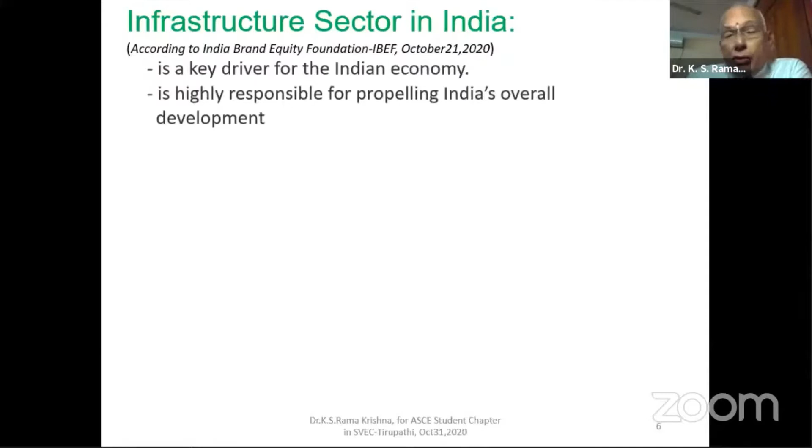With this great advice of our great civil engineer, I would start with the infrastructure sector in India. I have taken this very latest data from the India Brand Equity Foundation. This is the latest on India infrastructure: it is the key driver for the Indian economy, highly responsible for propelling India's overall development. If you develop infrastructure, your overall development also will take place.

We have seen this when the Golden Quadrilateral was completed, how the country had changed a lot. The government of India has an intense focus on some projects, importantly the infrastructure projects, so that they are completed in time, in a time-bound manner, and in the process we will be able to create world-class infrastructure.

The government's policy support includes several measures, but I've just picked up a couple of them. One is housing for all—we are about 134 crores, even a quarter of that, if we make houses, I think everybody will be housed. Another is smart cities, and 100% foreign direct investment on the automatic route across various infrastructure sectors, including power, bridges, dams, roads, and urban infrastructure. In these areas, the government has said 100% foreign direct investment can be automatically brought in.

India requires about 50 trillion, about $777.7 billion by 2022 to have sustainable development. The most important thing is getting the money, and we should be able to spend it. This is where the construction industry plays an important role. If you want to spend 50 crores in a month, you must have the right equipment and people so that you can construct and get that kind of expenditure. Otherwise, money will only be in the bank and you will not be able to spend it. So you should have all the resources to spend so that you can construct the infrastructure. Simply getting $777 billion by 2022 doesn't help unless the construction industry is geared up for that.

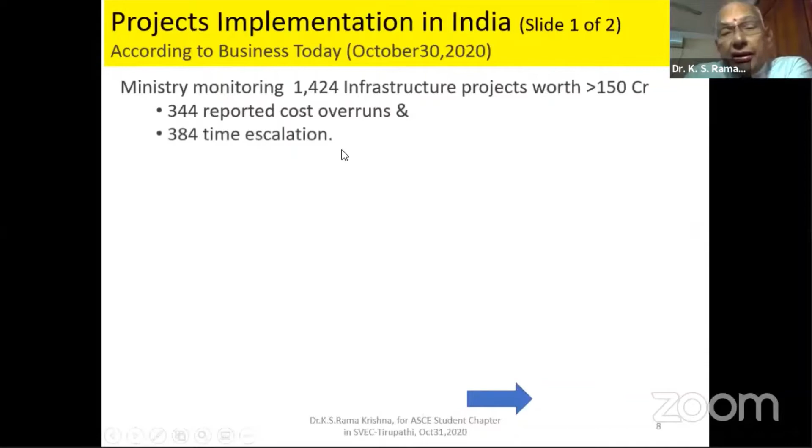Out of that, 344 projects are reporting cost overrun. That means their estimated cost is exceeded even before completion of the project. Then there are 384 projects that have undergone time escalation.

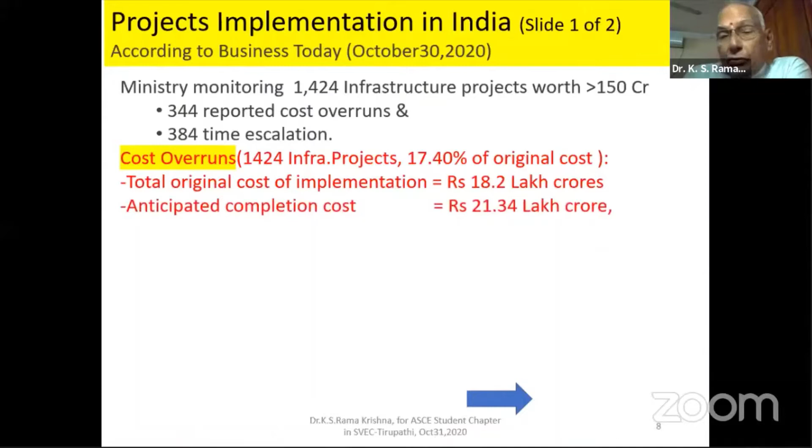Now, looking at this cost overrun, let us look at the figures of these 1,424 projects. Total original cost of implementation is 18.2 lakh crores. Anticipated completion cost is 21.34 lakh crores. You can see the difference. Overall cost overrun is 3.16 lakh crores, which is about 17.4% over the estimated cost. This is as per the Ministry of Statistics and Program Implementation, December 2018.

I think I'll do it. I don't know how to reduce this screen, side screen here. Okay, now that is as far as the cost overrun is concerned.

Now let us look at the time overrun. Out of the 384 projects that have gone over estimated time, 113 projects have overall delay in the range of 1 to 12 months. 61 are in the 13 to 24 month range. 101 projects are delayed by 25 to 60 months. 109 projects show more than 61 months and above, that means more than 5 years delay.

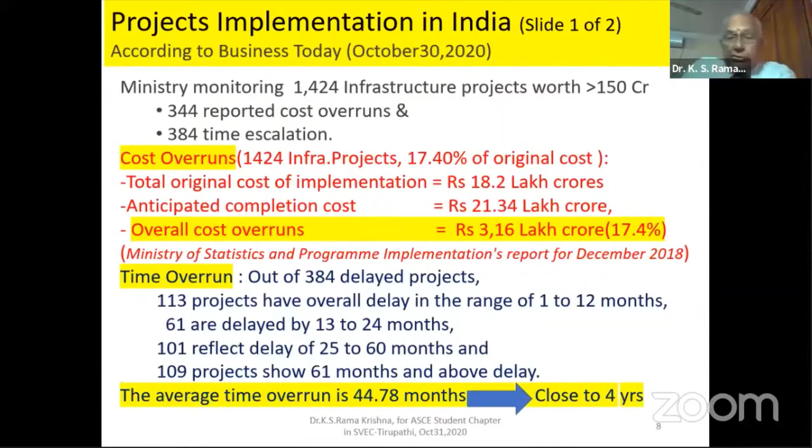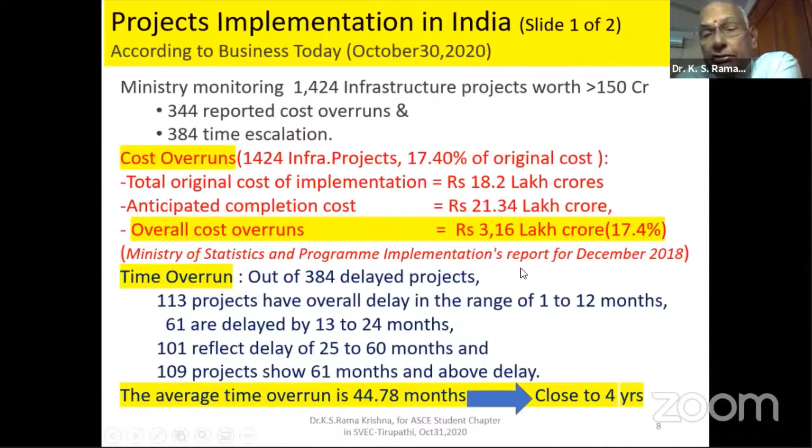Now, looking at this, the average delay of the projects is 44 months, that is almost 4 years. Can we believe this? Can we afford this kind of delay, which is coming to a cost overrun of about 3.16 lakh crores? What are the reasons for this implementation delay and cost overrun?

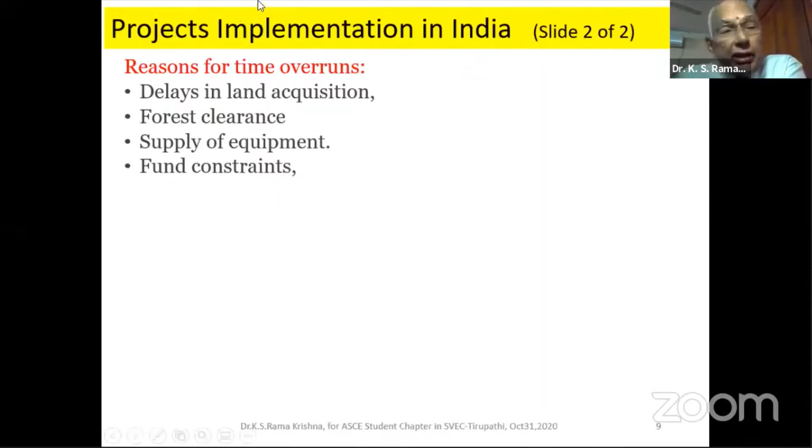Delay in land acquisition is a common problem. Forest clearance, supply of equipment, fund constraints - I think as civil engineers, we can't do much about this. But the other one, geological surprises - that is subsurface, the ground - that is related to my field, that is geotechnical engineering. The geological surprises, geo-mining conditions - I don't exactly know what that really is, mining or something else.

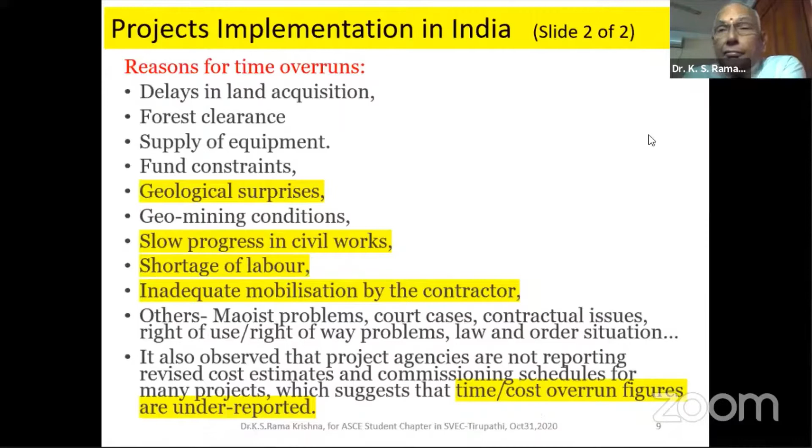And slow progress in civil works, that is connected to us as civil engineers, shortage of labor, inadequate mobilization by the contractor, that is also concerning our construction industry. Others like Maoist problems, court cases, contractual issues, rights - so all those things are there. And at the end, unfortunately, I'm not able to show this on the screen.

Now you see this, for many projects, the time and cost overrun figures are underreported. That means the actual delay and cost is more than what is shown here.

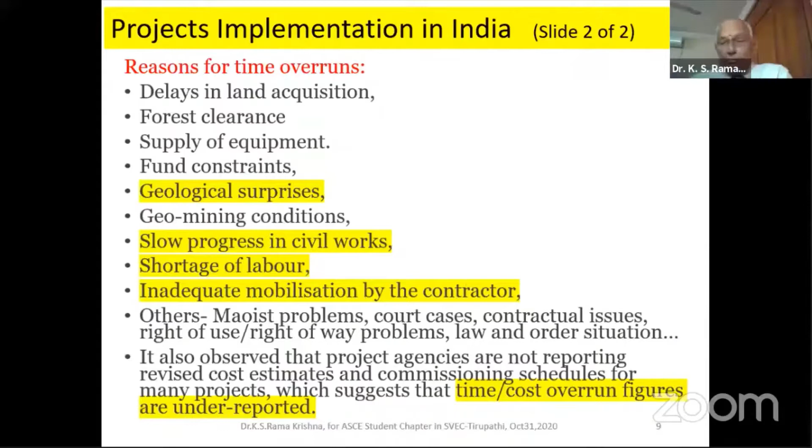I'm sorry, I'm not able to move this away from my screen. What, sir? No, this bottom toolbar, I'm not able to move it out because some lines I'm not able to read.

Okay, now what we should do as civil engineers is think about how to mitigate, how to reduce these problems being faced by our country in project implementation, particularly in those highlighted areas of geological conditions, labor availability, equipment availability, mobilization of resources by the contractors. These are the areas we as civil engineers must look at, and some of my slides will address them, not directly but indirectly. You can see that and understand.

Now, success of infrastructure project implementation depends, from my experience, on a good feasibility report. Normally the feasibility reports are also not done sincerely. They just put up some things and call it a feasibility report, which is not actually factual, but it is some sort of report which we cannot totally depend on. And timely finance and investment.

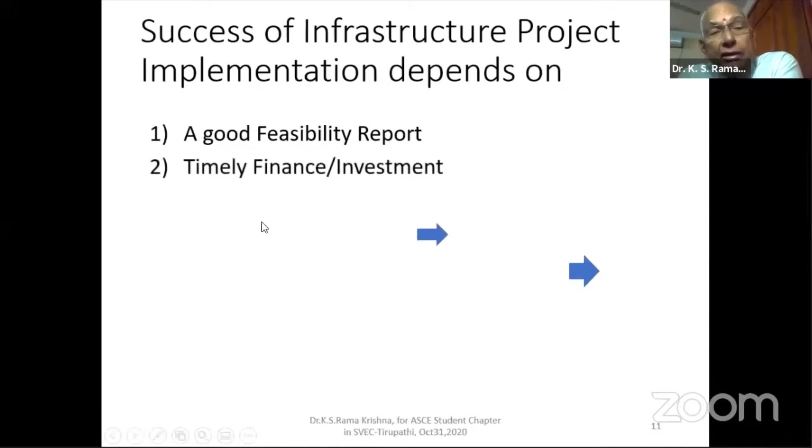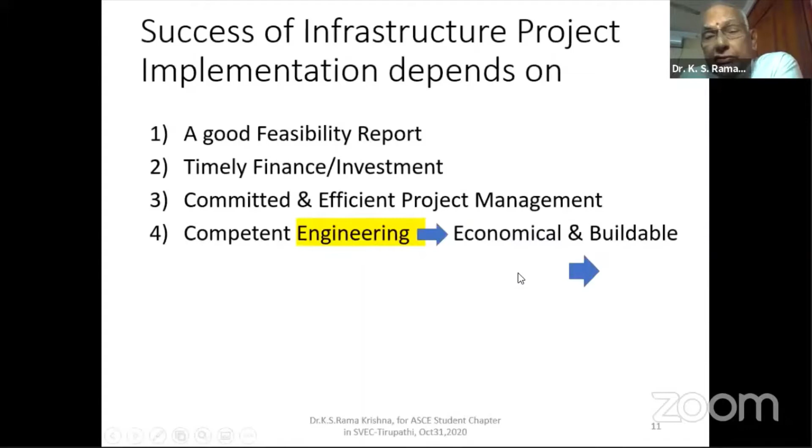Committed and efficient project management is very important. Competent engineering is also important—the engineering must be economical and buildable. Whatever is done in engineering should be buildable, considering available resources, manpower and equipment. Accordingly, designs should be done using appropriate technologies and equipment. Once these things are in place, you will have safer, faster projects to build, with less manpower and less management required at sites. That is what is called lean construction.

Then you need experienced construction engineers and a skilled workforce. If most engineers are going to IT fields, there will be very few left for construction and engineering design. This is a very serious problem facing the country. So even if you have 777 billion US dollars, or 50 trillion Indian rupees, available by 2022, without experienced construction engineers, skilled workforce and equipment, we will not be able to use that money in time. Your projects get delayed, and your infrastructure gets delayed.

Briefly, what is engineering and what is technology from a project point of view? As students, you must have seen that some colleges are called colleges of engineering, some colleges of technology, some colleges of engineering technology—various definitions and titles exist for engineering colleges. As a person who came from projects and construction, I am talking only from the project point of view, and you should understand it from this point of view during my lecture.

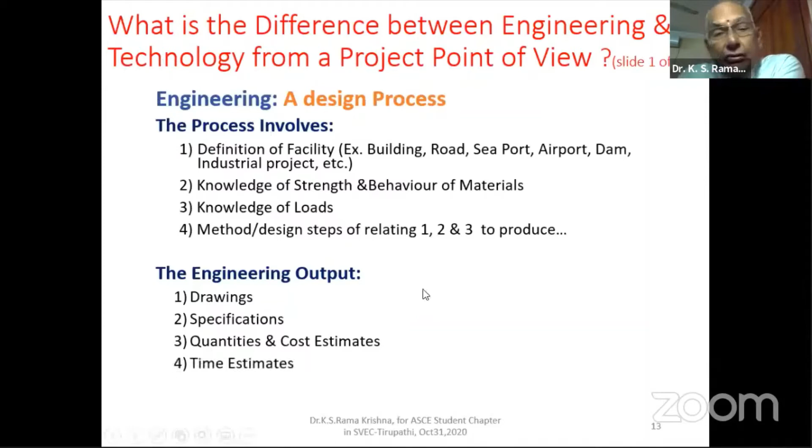Then what is the output? The output is basically in three categories. The first is the facility that you have created—at the end of construction, you see the facility created. But then, have you done it in time and within cost? That is the most important thing. If you have not done these two things—within cost and within time—you know you have not done a proper job. Although the building may look beautiful, if you have lost a lot of time and exceeded the estimated cost, then the project is in trouble.

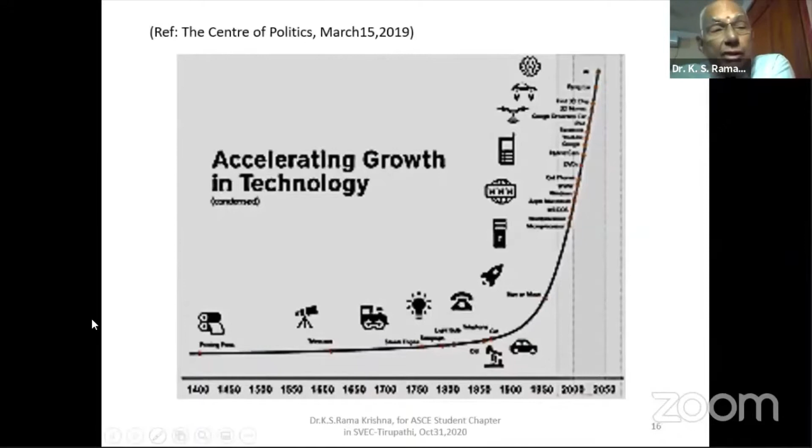You see what has happened. This is one I have taken from Center of Politics, March 15, 2019. You can see the acceleration of technology with time, starting from 1400 to 2050. Initially it has gone slow - telescopes, printing press, telephone, electric bulb, rockets. But of late, in the last 50 years, technology has gone exponentially, from rockets to artificial intelligence, mobile phones, internet - all happening in the last maybe 15, 25, 30 years. It is an exponential growth of technology. Unless you are abreast of these technologies, you will not be able to ensure growth at a rapid pace.

Now coming to the foundations, what is the role of foundations in project implementation? Normally, when you look at the project cost estimations, the foundation cost of a total project comes to 1 to 5% for an industrial project.

Supposing if it is a bridge project - bridge on river, offshore platforms, jetties, bridges - all these things normally come close to 50% of the project cost being the foundation cost. All normal industrial projects, the foundation cost will be about 1 to 5%. So it looks like a very small percentage of the total project cost.

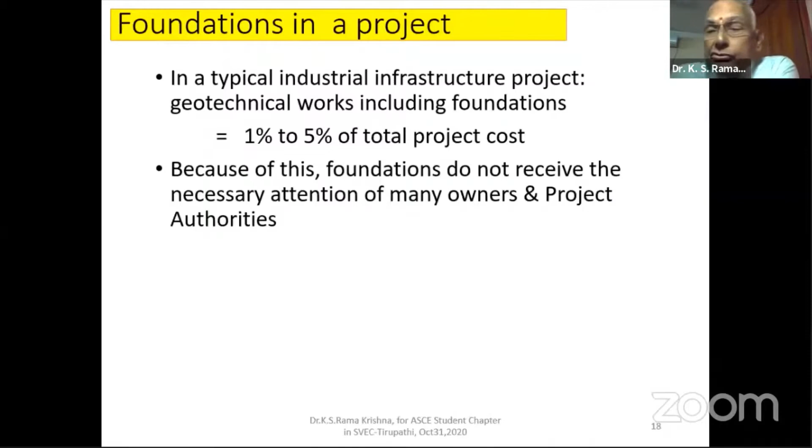Because of this, the owners and project implementing authorities do not really put sufficient attention to this foundation. They just call some subcontractor, whether he knows the job or not, and give the job to them, and the job will not be executed in time and properly. The project starts, they bring some contractors, subcontractors, foundation contractor, and ask him to start the job. He will not have the right knowledge, will not have the right equipment, right people. So the project gets delayed.

In a project of, let us say, 40 to 50 months, for the first 6 months, people may not really bother about the delays. Whereas normally a typical foundation construction time will be maybe 3 to 9 months, less than 1 year. So most of the time is lost because of poor selection of the subcontractor, the methods, the equipment, and the labor. By the time they realize this, the project is already delayed by at least 6 to 9 months.

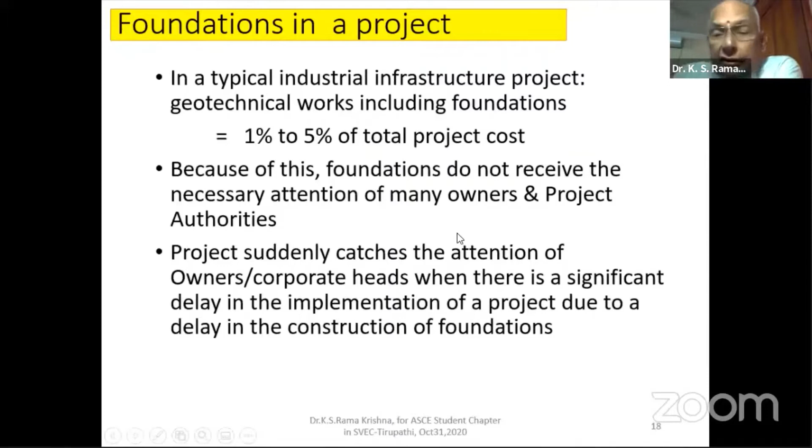That will go on getting accumulated, and the entire project gets into trouble. So unless the foundations are done properly and in time, the entire project suffers, because without foundation you cannot do anything. First thing is the foundation. It has to be done in time. If it is not done in time, the entire project is delayed. There's no way you can recover.

Now, one project I was involved in, in the eastern part of our country, where we were setting up a steel plant. The client had selected a type of foundation - the client's consultant wanted bored cast-in-situ piles. We got the total job, and when I went to site, we told them this is not the right type of foundation. I requested a demonstration of a new technology, and we spent our own money and told them they better adopt this. But because of our contractual procedures, they said we can't change the contract now.

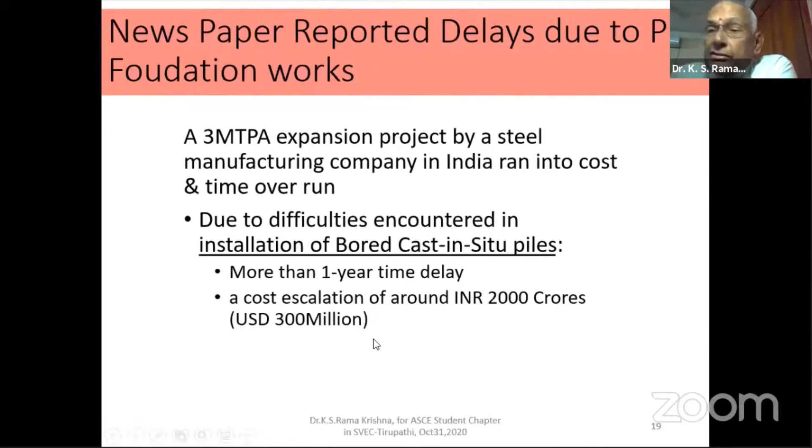As a result, this project got delayed by more than 1 year and resulted in a cost escalation of more than 2,000 crores. And these are not my figures - the CEO of this steel company published this in the newspaper: a 3 million ton per annum expansion project resulting in a 2,000 crores cost overrun and 1 year time delay. So whose money is this? It is public money, and we put it down the drain just because of delay in foundation works. Selection of foundation was not correct, and the whole project went to a disaster.

Now, as you know, every structure requires a foundation - foundation is the first step. First step, I mean not site clearance and survey and things like that. The first actual construction, the first step in construction, is foundations.

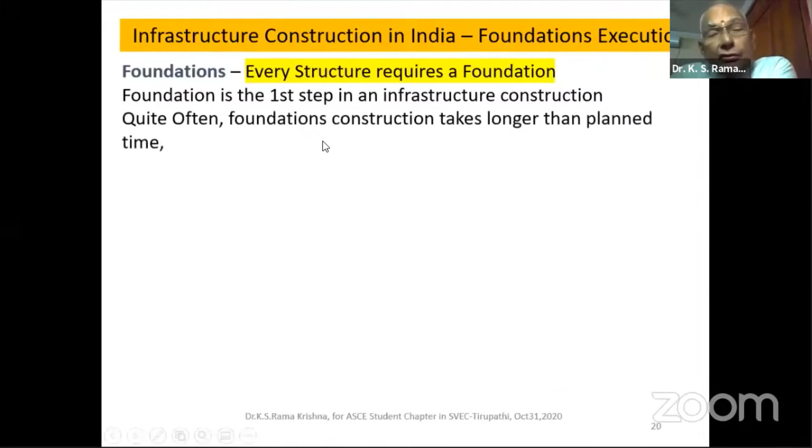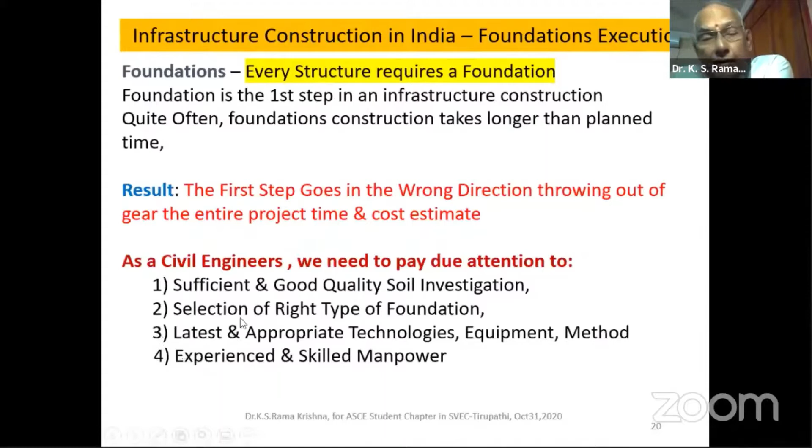Quite often, foundation construction takes longer than planned time, and the result is the first step goes in the wrong direction, throwing out of gear the entire project and time cost. So as civil engineers, what we need to do is pay due attention to sufficient and good quality soil investigation, selection of the right type of foundation, latest and appropriate technologies, equipment and method, and experienced and skilled manpower. Unfortunately, most construction engineers are not familiar with the latest foundation technologies happening in the world, and if they themselves don't know, you can imagine where the skilled manpower and skilled engineers will come from. So these are the most important parts of a foundation construction.

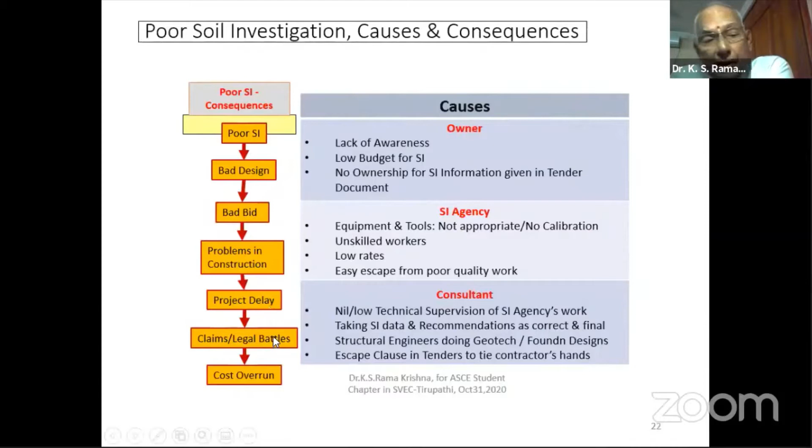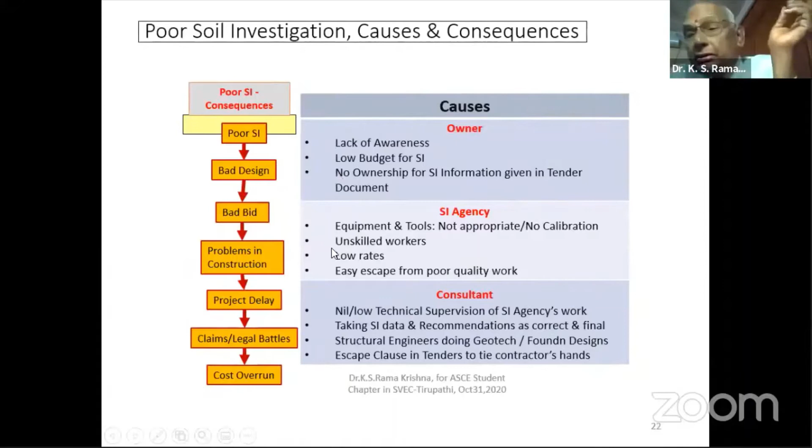Soil investigation is something we are trying to improve at the Deep Foundation Institute, by training laboratory technicians and field operators. The most commonly encountered challenge in a project is the quality of soil investigation and report. People generally gloss over this and don't announce it, and they proceed with design based on poor quality soil investigation reports. Numerous projects of national importance suffer delay and cost overrun on account of poor soil investigation. I have shown one flow chart of how poor soil investigation results in various problems, from bad design, bad tender documents, during-construction problems, project delays, contractor claims and legal battles, and cost overruns. I don't want to spend more time on this, so you can go through it in detail after the lecture.

Now, the second point is selection of the right type of foundation. I'll give you a small flow chart on how you should proceed in selecting the type of foundation. I'll spend a couple of minutes on this.

First, get good soil investigation done and obtain a good soil report. Engage a knowledgeable geotechnical consultant and let him study the soil data and the loads coming onto the soil. Also consider the performance criteria - whether the structure is sensitive to settlements, whether it's in an earthquake zone or a cyclone prone area. All these aspects should be studied, along with cost, time, and project schedule.

If all these things are considered, the first choice should be shallow foundations. Shallow foundation means, particularly where soils are very good like in Tirupati, you can just make an open excavation and construct an isolated foundation, a mat foundation, or a combined foundation - all at shallow depths. These are called shallow foundations, and normally they are cheap if soil conditions allow. This should be our first choice. We should not jump to pile foundations even if the structure is very important.

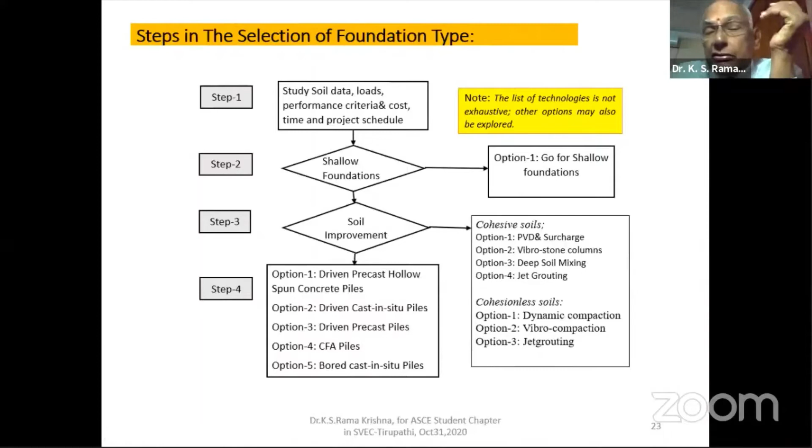When you encounter soils, you broadly see them as cohesive soils like clays and silty clays, or cohesionless soils like sands and gravels. There are several technologies available for soil improvement, and the list I've given here is not exhaustive - there are more than 40 or 50 technologies available, of which I've only mentioned about 10 or 15. You should explore all these options and consider soil improvement as a second alternative to shallow foundations.

I'll show these things when I'm showing you some photographs, and I'll explain them at that point.

Now, if shallow foundations are not acceptable and soil improvement is also not acceptable - because the structure loads are very heavy and critical, and sensitive to settlements - you have to look for other deep foundations.

Driven precast hollow spun concrete piles are the next cheaper option among deep foundations. Then there are driven cast-in-situ piles. Each of these has a different method, different material, different process of making them, and different testing procedures - many differences exist among them.

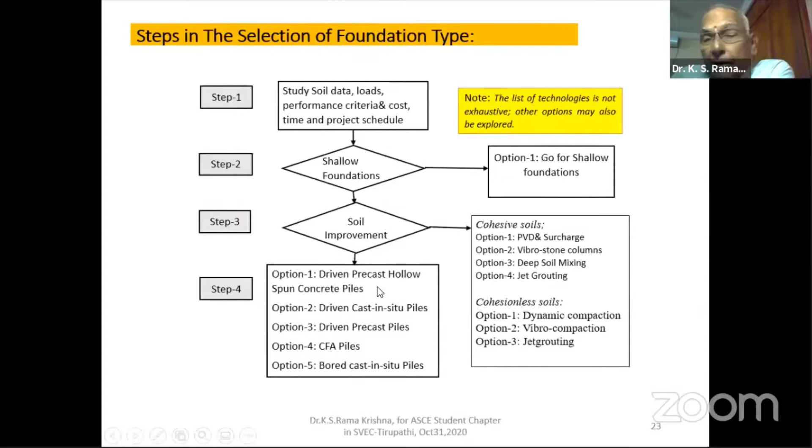Driven precast hollow spun concrete piles. This is the cheapest form of pile, other than timber piles, which nobody is using these days for important structures. So driven precast hollow spun concrete piles: we, from L&T, have done them in Dahej, and we have done them in Kakinada.

Option 2 is driven cast-in-situ pile. That is the next cheaper one. The third one is driven precast piles. This we have done in Kakinada, about 1.5 million meters of piles. We have done more than 40,000 piles. We have done in Kakinada for 2 gas terminals, one by Reliance, one by the Gujarat State Petroleum Corporation.

The other one is CFA piles. I'll explain to you what it is. Continuous flight auger piles. From the Deep Foundation Institute, we have tried to bring this technology. We have already done some demonstration, spending 80 lakhs, and we created a manual. Now we have approached the Bureau of Indian Standards to make it a code. This is the next cheaper one.

The last one among piles is bored cast-in-situ piles. They are very expensive. Unfortunately, in our country, this is the most common pile. Deep foundation is bored cast-in-situ pile. Unfortunately, that is one of the most expensive piles. Very unfortunate. We have got into the most expensive type of pile.

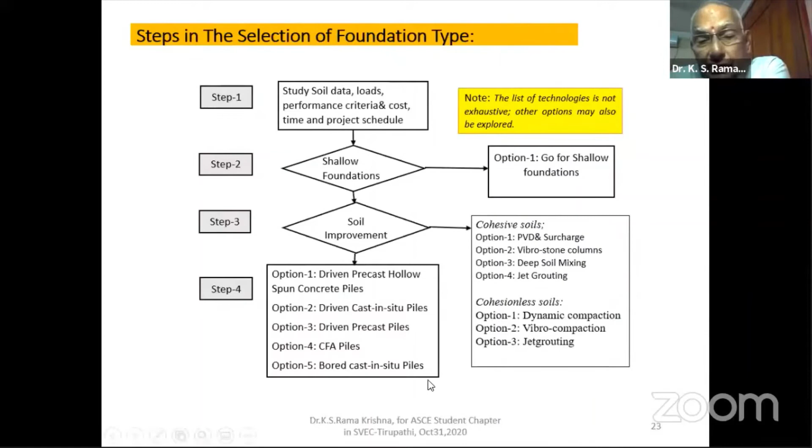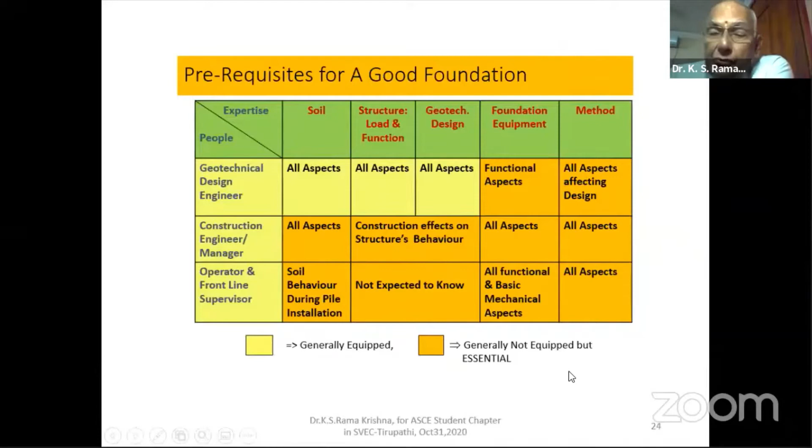Kindly go through them. Most of the time, the ones that I have shown in orange, people are supposed to know, but they don't know. So you can imagine how foundation construction becomes one of the most frequent reasons for infrastructure project delay.

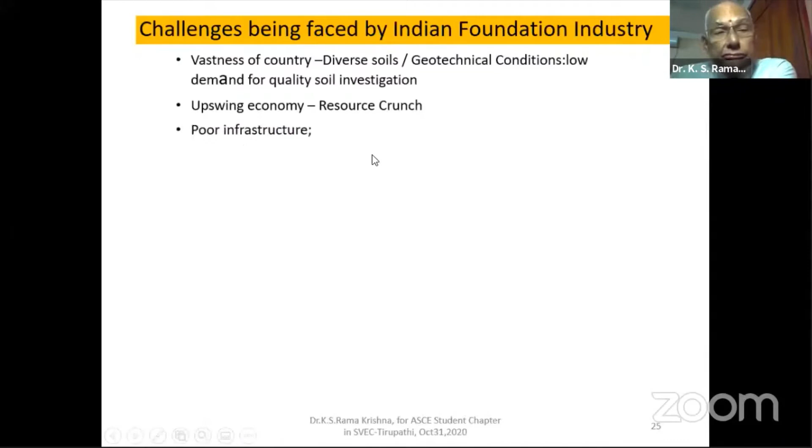Challenges being faced by the Indian foundation industry: the vastness of our country, diverse soils; geotechnical conditions are very different. If our economy improves, we don't have the manpower and equipment resources to actually construct things in time, because we will be short of resources. We have got poor infrastructure. Some of the equipment cannot reach the sites. Low technology and low mechanization. We have only recently started mechanizing. Out of 45, 50 technologies, some 2-3 technologies are used in India. The rest of them are not being used.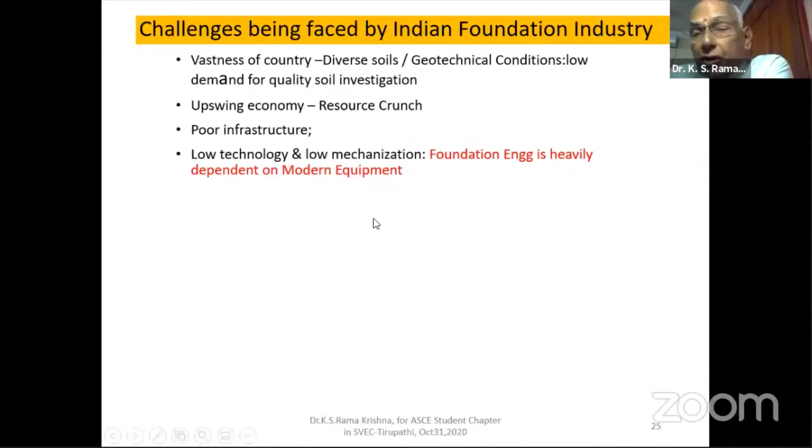Geotechnical knowledge is confined to the academic institutions. Most of our academic professors are very good and have up-to-date knowledge of geotechnical engineering. But when you go to practice, to the construction industry, very few people are exposed, and most geotechnical engineers are not in the construction sites or in the design offices. Most of them are in academic institutions teaching. The importance of the geotechnical engineer in design and construction is not widely recognized in India. Whereas if you go abroad, even to Dubai or Singapore, you will find that geotechnical engineering is given very good importance.

General reluctance to encourage new technologies. We are somehow averse. We are not interested in bringing new technologies. Even technologies abroad that are 40, 50 years old, we are not willing to bring them. We bring and use only grandmother-time technologies. Site supervisors' exposure to foundation technologies is very low.

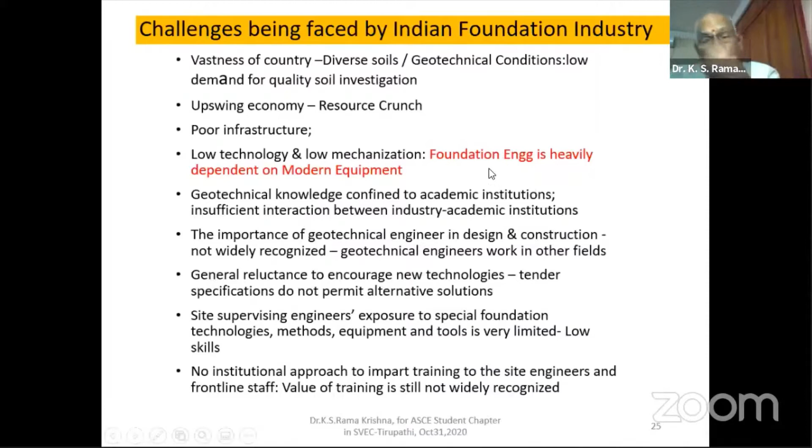So these are all the challenges being faced by the foundation industry. That's why, from 2010 to 2012, we tried to establish a Deep Foundation Institute in India. In the last 9-10 years, we have done a lot of conferences and seminars. Then we have done one technology implementation. We did a manual. Now we are going to make it an IS code. So these are all the things we are doing as the Deep Foundation Institute to help the country. So what are the various foundation technologies? Let us look at that.

Now, foundation construction is highly equipment dependent. Unlike other civil construction areas, foundation construction is almost 95% dependent on latest equipment. And unfortunately, in our country, we do not have this equipment. Most of the equipment is imported. Not a single equipment is manufactured in India.

I think it's our Prime Minister's Make in India policy. I hope somebody will start making it. Whereas China has been making most of the equipment required for themselves, and they are exporting them. So unless this equipment is manufactured in India, we will not be able to do it.

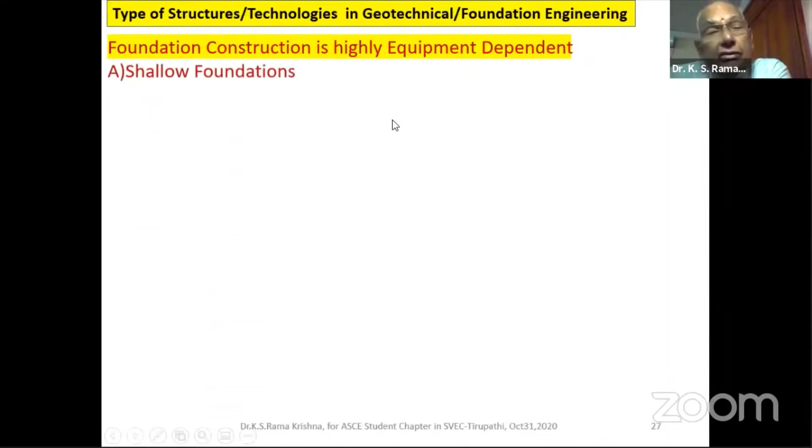Now, first thing, as I mentioned to you, shallow foundations. They have various technologies. Then second one is deep foundations, which I mentioned to you already in the flow chart. One is bored cast-in-situ piles, CFA piles, driven cast-in-situ piles, hollow spun concrete piles, steel tubular piles, and several of them. I have mentioned only 6.

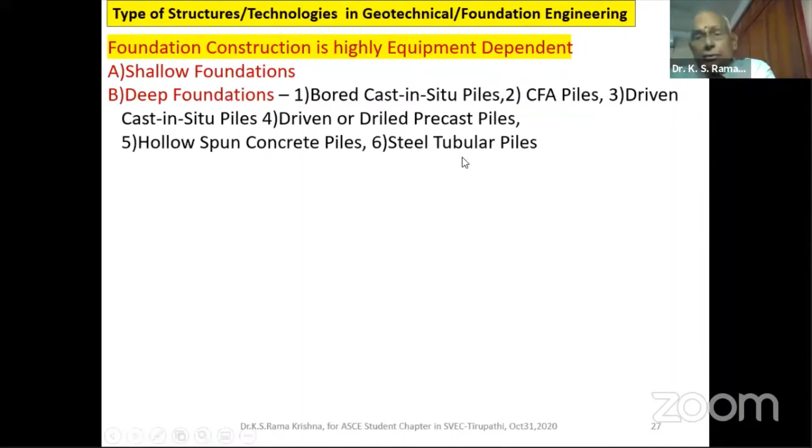Now coming to soil improvement and soil modification: vibrocompaction, stone columns, lime and cement columns, prefabricated vertical band drains and surcharge preloading, vacuum consolidation, deep soil mixing, cutter soil mixing, jet grouting. These are only a few technologies. There are many more technologies.

Then excavation support systems: diaphragm walls, contiguous piles, secant piles, Berlin walls, steel sheet piles. These are all used in our metro construction, underground station construction, and also in our coastal projects like jetties, wharves, port structures.

Slope and embankment stabilization using soil nails, largely used in Bangalore and other places. Gabions at the river fronts and all that, we use gabions. Anchors, we use in several places in excavation support as well as slope stabilization. Geotextiles, we use in embankment stabilization. Reinforced earth structures, you must be seeing bridge approaches and all that are done with reinforced earth structures.

Then dam cutoff walls using plastic concrete cutoff walls and other physical barriers. These are only some of them. As I mentioned to you, there are more than 45-50 technologies. I just listed about 25 of them. And these are all the technologies that are available.

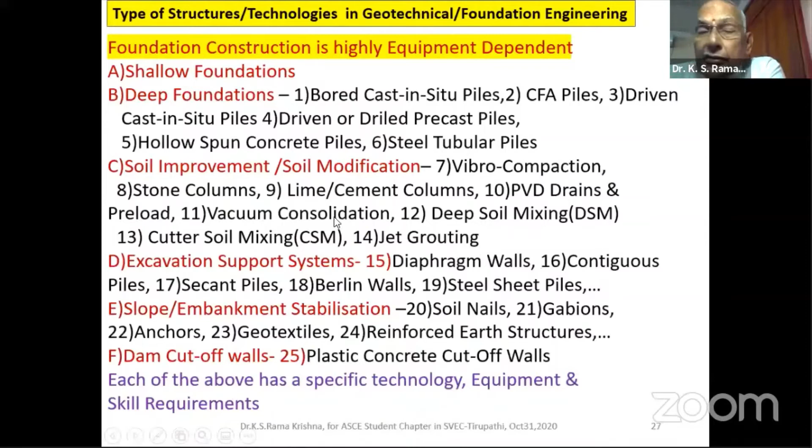Now I'll just go through quickly some of these photographs. Bored cast-in-situ pile installation sequence, for large diameter piles. This is a piling rig. Depending on its capacity, the cost of the equipment is lowest about 3 crores and highest around 15 to 20 crores. So if you want to do large diameter, very deep piles, you have to have that kind of equipment.

And we have got a few companies like L&T, Afcons, Cementation, Keller, Simplex. These companies have got a good number of equipment. Here, what we do is we do a temporary casing to stabilize the soil. Then we start digging the soil using this equipment. This is called boring tool. This is called Kelly bar, and this is connected to this. And here you have got winches and drive motors.

This goes through and drills the hole. We use a liquid called bentonite or a polymer to stabilize the walls of this borehole so that it doesn't collapse. Once we reach the required depth of the boring, then we install the reinforcement cage. Then we pour concrete by a method called tremie concreting. A long funnel is put, and concrete is delivered at the bottom. From bottom up, the concrete is brought up, and the pile is completed. This is how a bored pile is constructed.

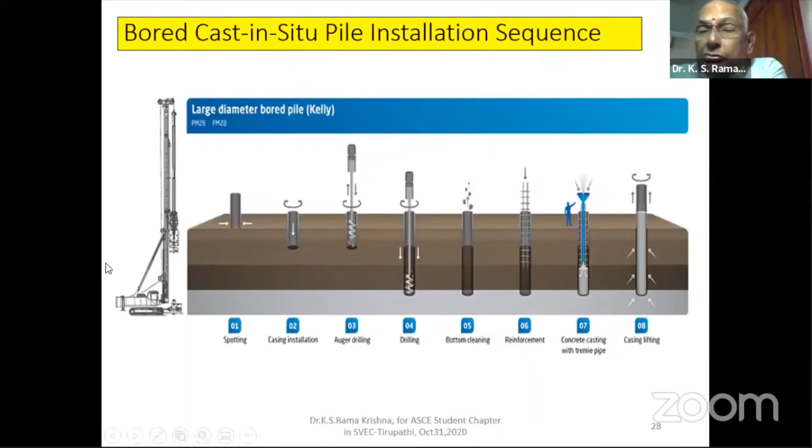A lot of issues come in during this if the contractors are not quality conscious. Each bored pile is a pain. You will not be sure of the quality of the construction, and it leads to a lot of problems. You may not be able to take the loads. But unfortunately, this is the most common, and one of the most expensive ones in the country.

Another one is driven cast-in-situ piles. This is also very common in India after bored piles. Here, first we drive a steel casing tube to the required depth with a bottom plate which is sacrificed. We leave the bottom plate in the ground, and we use a hydraulic hammer from a powerful pile driving rig to drive this tube.

Once it goes to the required depth, we put the reinforcement cage, and then we put concrete using this red one called a concrete skip, pouring from the top, and the whole borehole will be dry. Unlike the bored pile where you have bentonite or polymer, here it is a dry hole with bottom closed. You put concrete, and using the same hammer, slowly tap the tube and remove it, leaving the concrete and reinforcement in the ground. That's how the pile is made.

It's one of the latest technology equipment which we brought in when I was in L&T. This is very high productivity equipment, and we can do projects much faster than when we use bored piles.

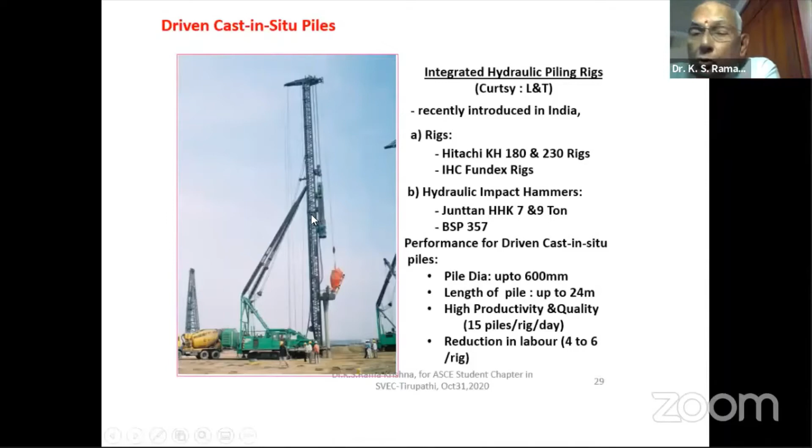The other one is precast driven piles. These are expensive compared to the other one, but if the size of the project is big, this can become very cheap. It's what we have demonstrated in Reliance Kakinada and several projects in Haldia, near Calcutta. Many projects we have done in L&T using these equipment. We brought them from Singapore, and these equipment also use a hydraulic hammer and drive the precast piles, already cast on ground, to the required depth.

So every day you can do about 400 meters, almost 20-25 piles per day per rig. Whereas a bored cast-in-situ piling rig can do only 3 or 4 piles per day. Here you can do almost 20 piles with one machine. So that is the kind of speed you can finish this job. The kind of job we did for our Reliance Kakinada, 6 months ahead of schedule. About 21,000 piles we have done.

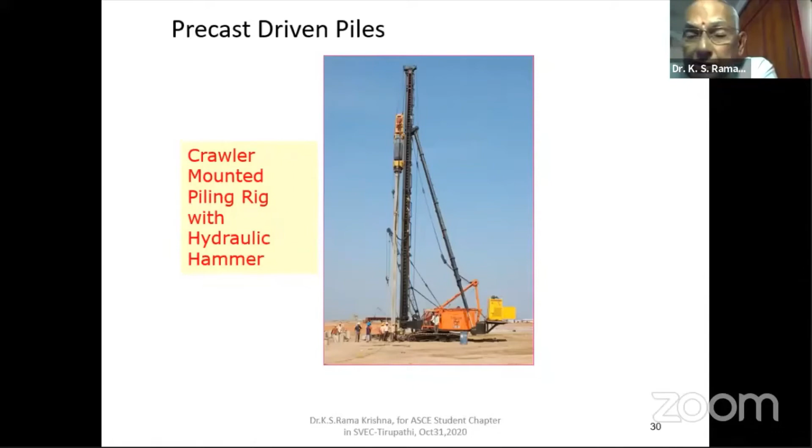The other one is continuous flight auger pile. This is CFA pile. This is a technology which is more than 30 years old abroad, but unfortunately, so far, nobody is trying this in India. So what we did was, using Deep Foundation Institute as a platform, we went to the industry and requested them to donate. We brought about 70-80 lakhs in both cash and kind. We requested a foreign manufacturer to bring his equipment, and we installed 6 piles and tested them, then made a manual. That manual is going to become a code soon.

Here, the piling rig will have a long continuous auger. This is like a screw. This drives into the strata, and this one will have a central hollow stem. And after it reaches the required depth, we introduce concrete from the top and pour it through this central hole. As it comes up, the concrete is poured inside, and the concrete is first. In a bored pile, we first put reinforcement and then concrete. Here, we first put the concrete and then put reinforcement.

There are some problems for doing this. The reinforcement cage may not go, so your concrete has to have proper flow characteristics. Its slump and spread have to be proper. All these things we have written in our manual. This uses the same piling rig that is used for doing bored piles, with small modifications. Whereas with bored piles one rig can do some 3-4 piles, this can do about 15 to 20 piles per day. So you can accelerate your construction, and the pile can become much cheaper.

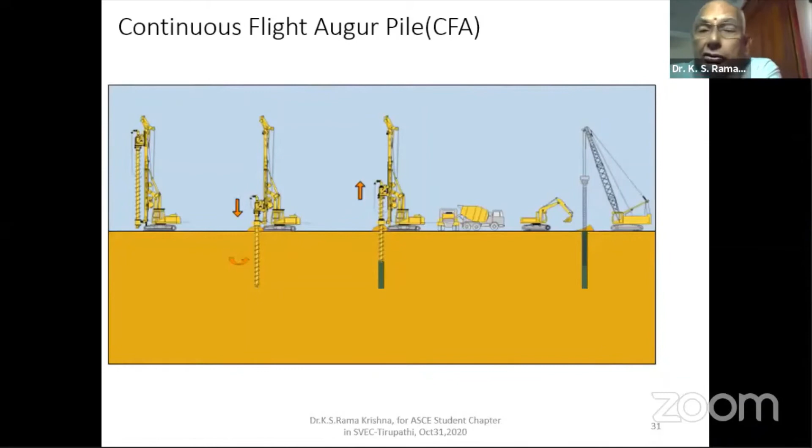The other one, I mentioned to you, is hollow spun concrete pile. They are also very cheap. L&T has used it, AFCONS has used it in some of the marine projects. Here the concrete is of very high grade, up to 80 megapascals compressive strength. It is a hollow pile, so it will not be like a solid pile like a precast solid pile, a bored pile or a driven cast-in-situ pile.

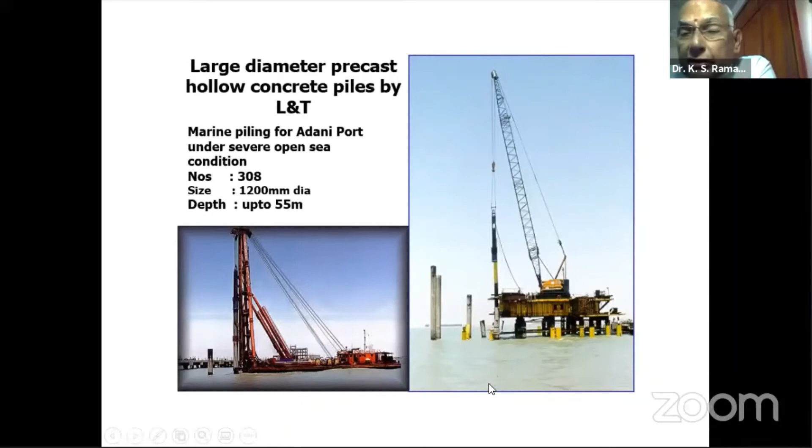Here it is hollow; it looks like a pipe, what we use in pipe culverts. It looks very similar to that, but with very high grade concrete. It can take a lot of compressive stresses. We use a hydraulic hammer, drive them to the required depth, and that's it. The job is done. In a few minutes, you can complete the pile. And it's very cheap.

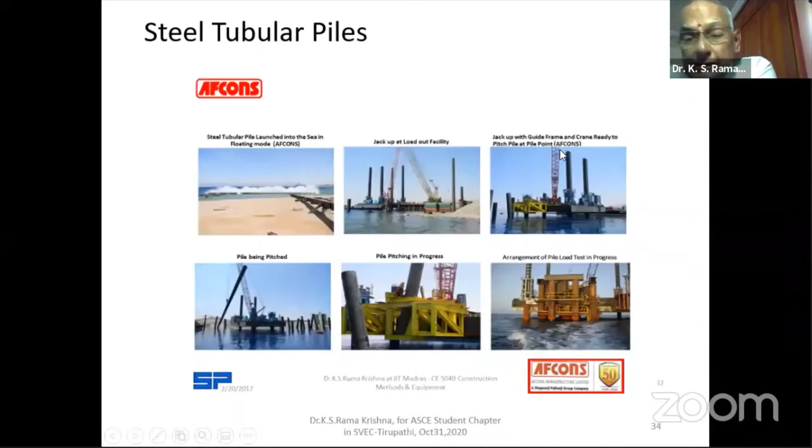Of course, the other one is steel tubular piles. They are very expensive, normally used in offshore and marine jetties. When I was in Engineers India Limited in the early 80s, we did a lot of offshore platforms using steel tubular piles. AFCONS has done it in some jetties, and L&T has been doing it too. They use a special barge for installation.

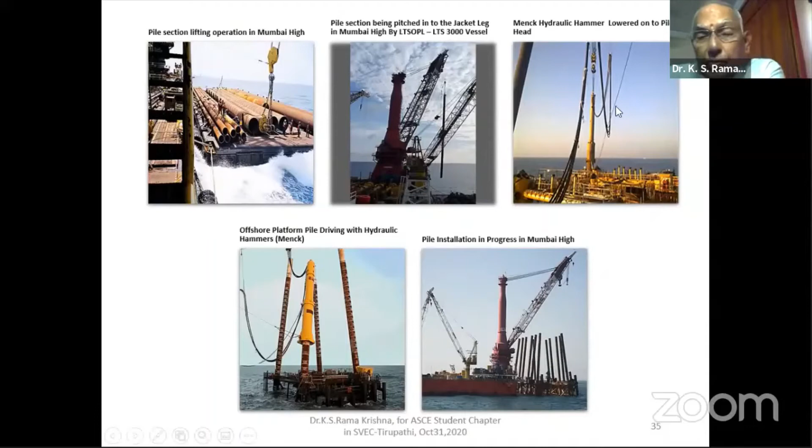Now, these are all what I mentioned to you as deep foundations.

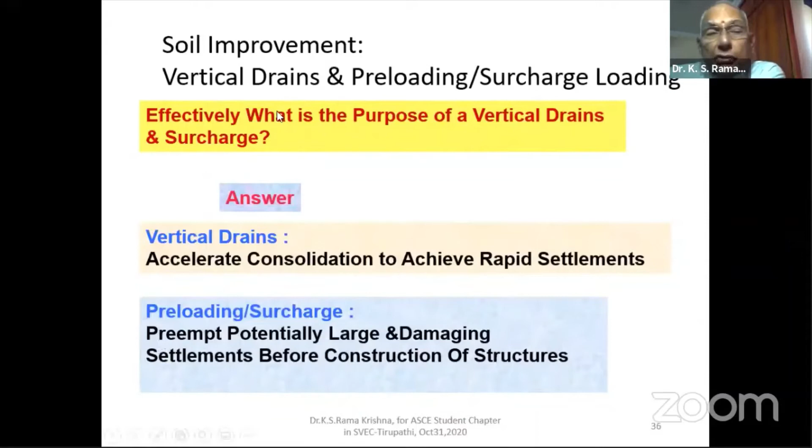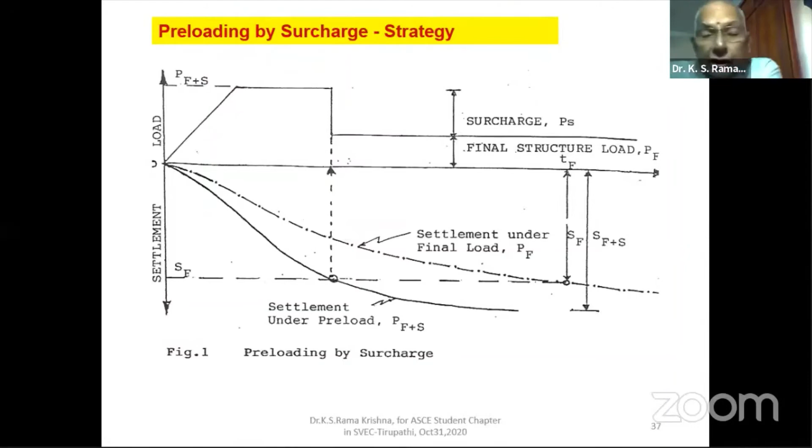I really don't know how many of you are able to follow this, but if these fundamentals are covered in your course materials, this should be understandable.

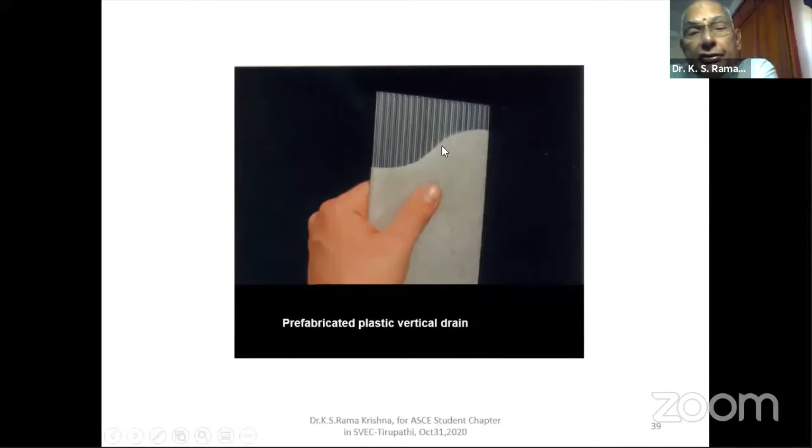This is that vertical band drain which I was mentioning. This is a geotextile, which is like a filter cloth, and this is a PVC drain material, which is a corrugated material, similar to our corrugated sheets used for sheet roof. Similar to that shape it will be. All these things act as drain paths, and this acts like a filter. Only water will enter, soil will not enter, and the water comes out. This is the one that will be installed into the ground.

This is what is called a stitcher. It is a special equipment, mostly excavator or crane based, and this is called a stitcher. Just like a sewing machine, whatever a sewing machine does, this also does the same thing. In a typical sewing machine, at the bottom there is a small hole through which you put a thread, then use that machine to pierce the cloth with that thread, and that's how you do the stitching. Similar thing they will do here.

There will be a hollow stem, called a mandrel, a steel mandrel of hollow cross section, rectangular cross section, and through that the vertical band drain material passes. This material comes in rolls, and is put into this. First, the mandrel with the band drain will go down, and once it reaches sufficient depth, the steel mandrel is withdrawn, leaving the band drain in the ground. Once all these band drains are installed, they put the sand load, so that under that load, using these band drains, soil water escapes and settlement takes place.

Now, this soil improvement technique is normally used for soft clayey soils and clayey silty clays. The other technique is for granular soils, normally sands and gravels, and we have used this in some of our steel industry projects, where we have man-made factory-run material called blast furnace slag. Those are also granular materials, and you can use vibro compaction for them.

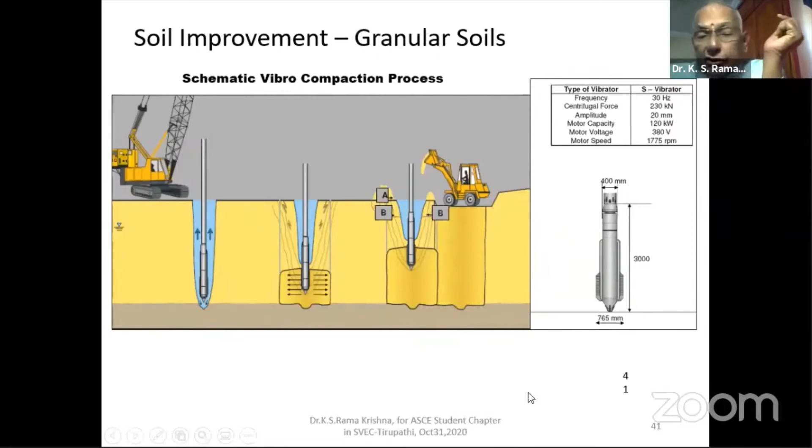This equipment uses water jet and vibration. It goes down to the required depth and starts generating vibration, so the soil starts collapsing and compaction takes place. That's how a compacted column is made next to another, so the whole area gets compacted. Soil settlement takes place, and the original ground settles like this because the soil has gone and got compacted. This is called vibro compaction, normally done in granular soils, sandy soils, or sandy silty sand areas.

The other one is used for clayey soils, using the same equipment called vibroflot. What they do is create granular pillars or granular columns inside the ground. They go to the required depth using horizontal vibrations, and once they reach that depth, they put gravel, like road metal, of about 4 inches down, and compact it. At the end you get columns like this, called stone columns or granular columns, which are able to take load.

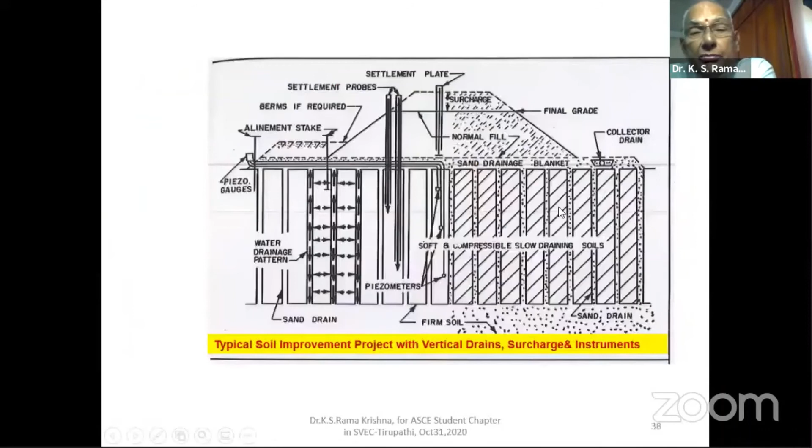We did this in the early 80s, both in Madras refinery and Vizag refinery, an extensive job when I was at Engineers India Limited as a design engineer. This stone column technique is one of the most extensively used because it is also the cheapest ground improvement method. Sorry, the vertical band drain is the first one, and the second one is this, using vibro replacement. This is called vibro replacement or stone column technique.

Now coming to retaining structures. These excavations we normally see whenever in cities when they do car parks and basements, you will see deep excavations done. Or on the roadside, in the hills, when you cut the hill and construct a road, the slope may become unstable. In those areas, you need to retain that earth from falling down.

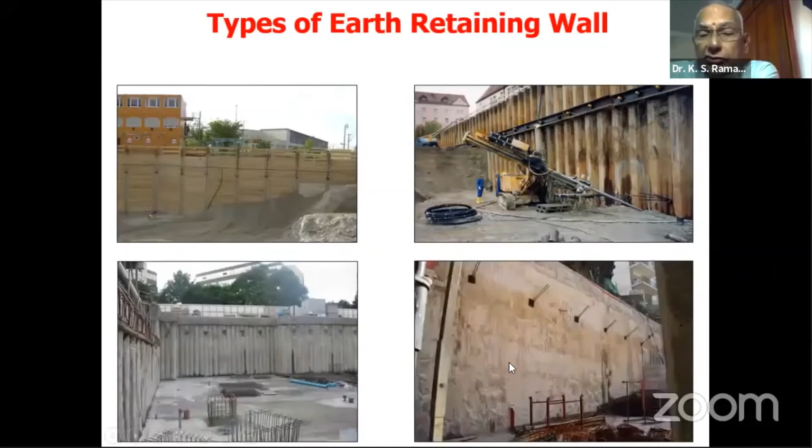Various technologies are available. This is called Berlin wall. This is called contiguous bored pile wall. This is secant pile wall. This is diaphragm wall with ground anchors. Each of these is a different technology.

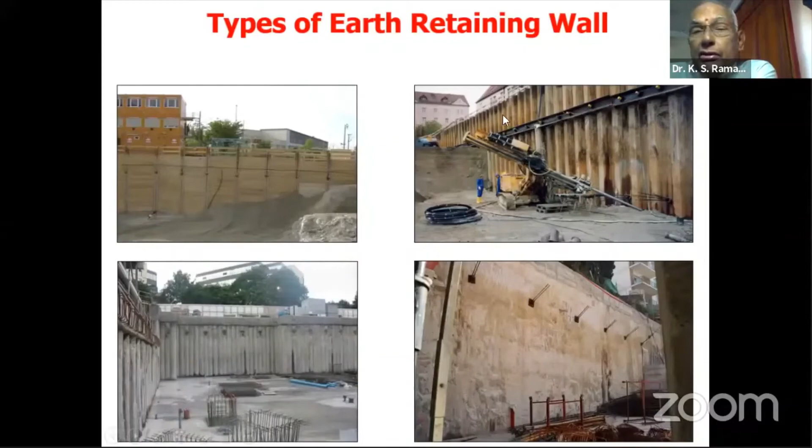And this machine is doing ground anchoring to give additional support. These are all ground anchors. This is a thing done with ground anchors. This is the Berlin wall.

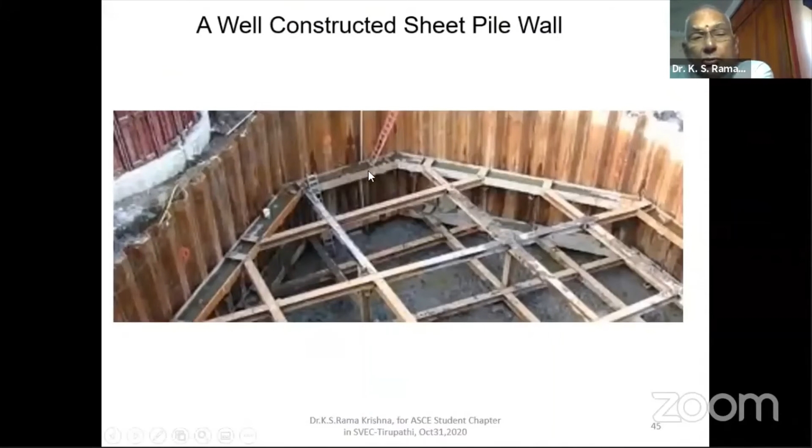And this is a sheet pile wall. We drive sheet piles and then do the bracing. This is a sheet pile, well-constructed sheet pile wall. That is another sheet pile technology.

We did about 7 webinars recently from the Deep Foundation Institute of India, DFI of India. Other things are secant pile walls, diaphragm walls, Berlin walls, sheet pile walls. These are all various ways of retaining the earth. Each is a technology, different method, different process, and that's how it is done.

In fact, at IIT Madras, I delivered around 12 lectures, each covering one technology, about 12 technologies in total. Each lecture is about 45 minutes to 1 hour, and all of those I condensed into a few slides today. So you can imagine how difficult it is to cover and make you understand.

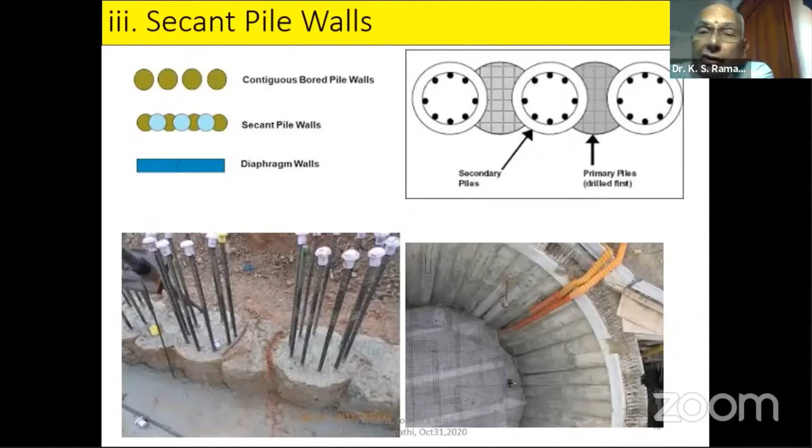But I'm just giving you an introduction so that you can go and read or watch YouTube, find out and understand them. Kindly go through them. These are all interesting technologies.

You commonly see them in hilly areas. If you've seen the Kanakdurga temple in Vijayawada, you will see that. In Bangalore, you will see them too. I don't know about Tirupati - you have similar soils there, but I'm not sure about soil nailing being used.

They put soil nails into the slope and then apply gunite with a wire mesh, to stabilize the soil.

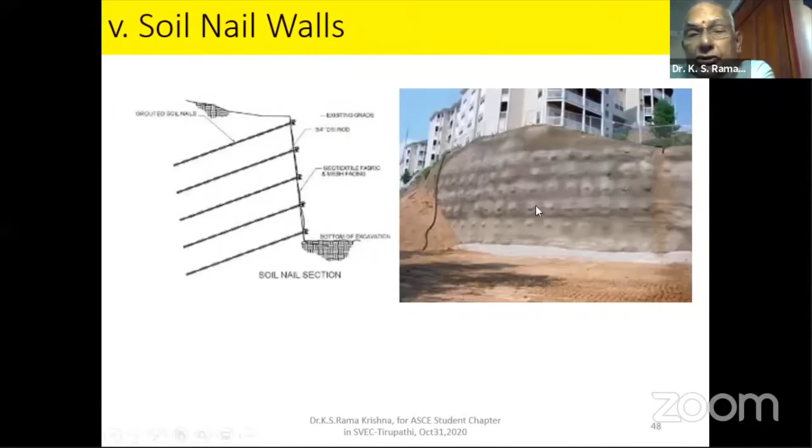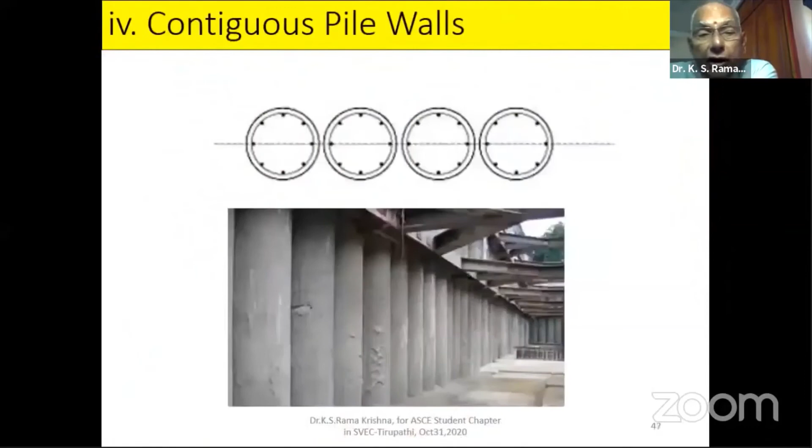They do this in situ, mixing soil with cement. Earlier, these were all made of pure concrete and reinforcement. Here, it is soil mixed with cement. In situ, they mix the soil with cement and make these walls because they are very good for temporary constructions. And sometimes you can use them for permanent construction depending on the kind of lateral loads that come.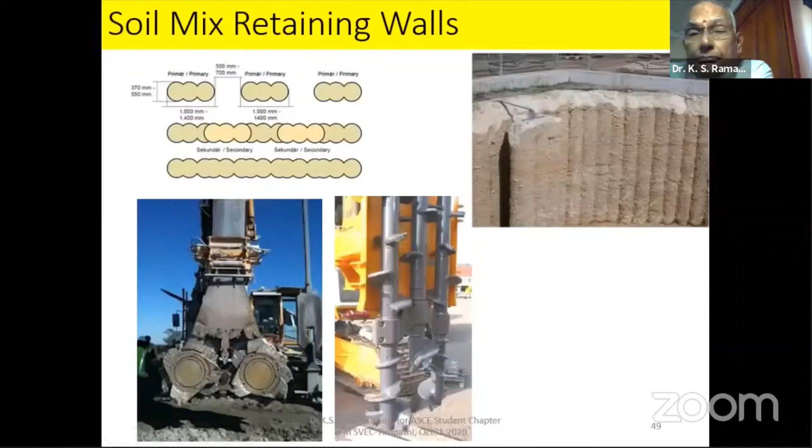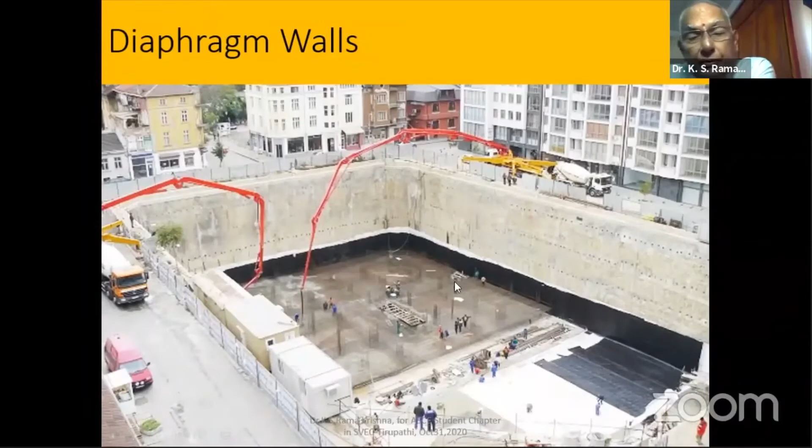The wall is a reinforced wall, between 600 mm to 1 meter or 1.2 meter thick, depending on the lateral loads and the depth. This is how they construct it, in small rectangular panels, contiguously. The other one is sheet piles.

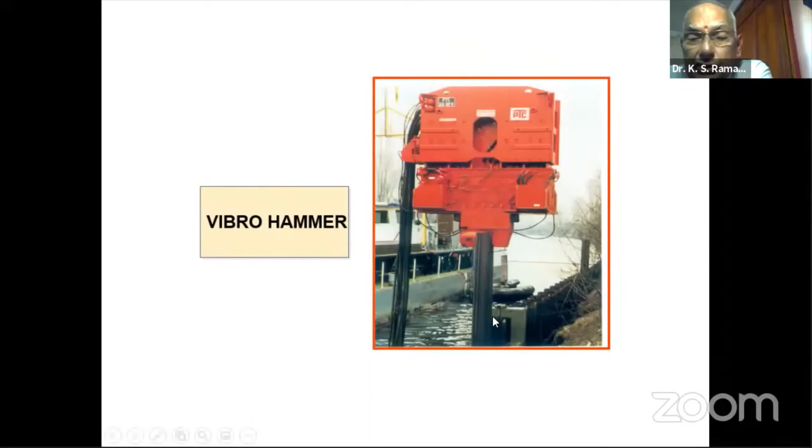This is another type of vibro hammer, normally operated from a crane. A crane is normally more expensive than an excavator. This is called Movax excavator, an excavator-based technology with L&T Komatsu that we used in some of our projects. This is another technology we brought from Finland.

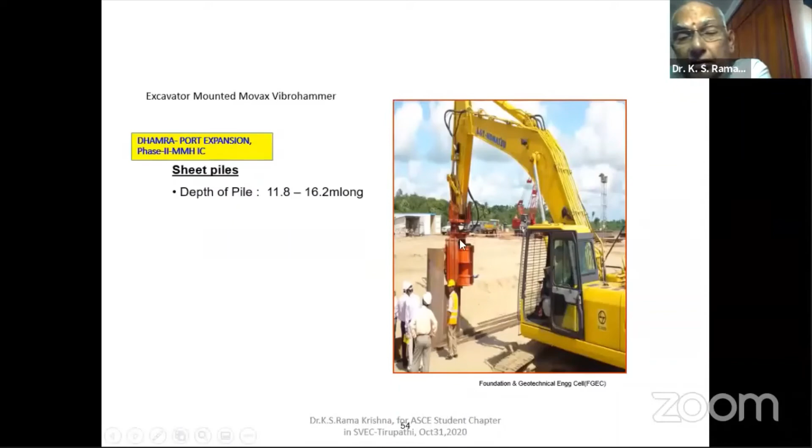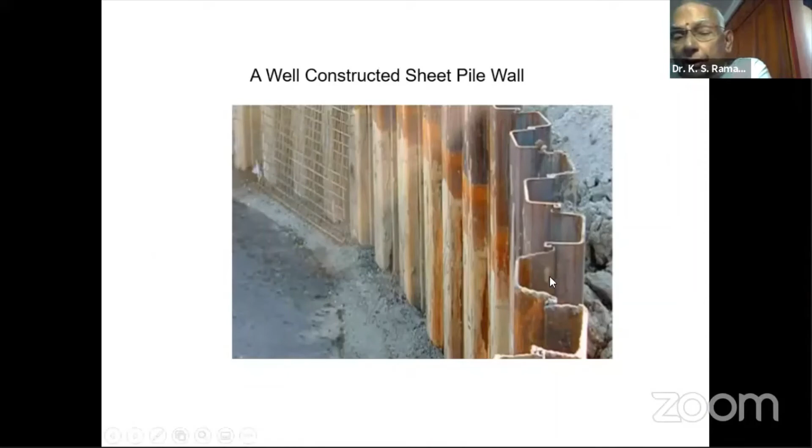You can see one of the L&T projects where we worked in the river. In Madhya Pradesh, we did this project using steel sheet piles. Each pile is driven and locked with the next one. This is all around the Narmada River, where they wanted to make an intake well for a thermal power plant. This is a well-constructed braced sheet pile wall.

Now, the last one I will come to is the dam cutoff wall. One of the technologies we brought from abroad in L&T, we did major projects using this equipment. This dam cutoff wall we did in the Himalayas, and we did a 97-meter dam cutoff wall in Bhutan. We also did the Polavaram dam. My team completed that project.

When you construct a dam, one side has water impounded or stored, and the other side, the downstream side, has no water. Now what happens when you arrest the water like this? The water tries to go through the bottom and come out the other side. Some of you in your irrigation class might have studied seepage and piping, and these are some of those concepts we apply here.

To prevent water from coming out and destabilizing the dam, we construct a diaphragm wall, a 600 to 1200 or 1500mm thick wall made of what is called plastic concrete. Plastic concrete is low strength concrete with high deformability. It is like the clay children play with, about 4 to 6 megapascals compressive strength.

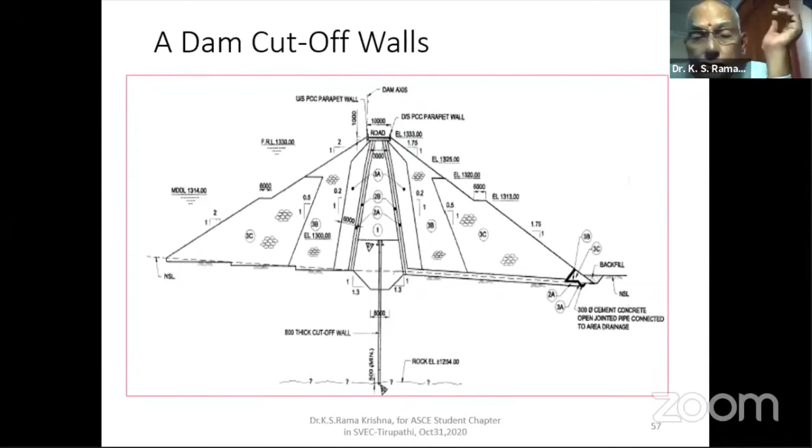We have done major projects near Simla and in Bhutan, very successfully, using these latest technologies. That equipment itself costs 30 crores.

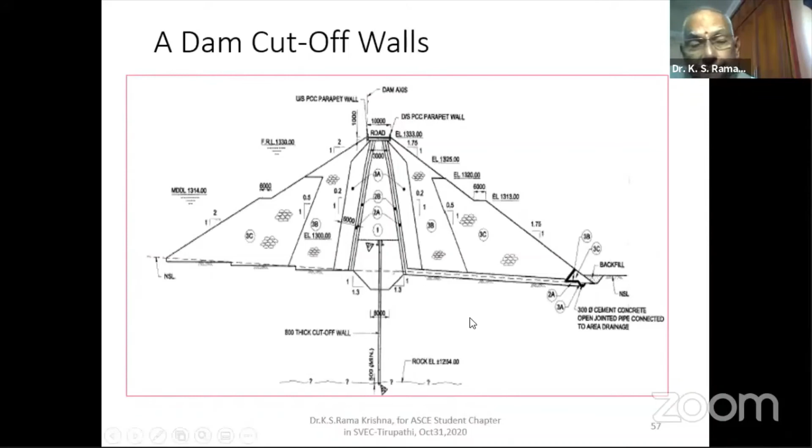Now, this is one side with a cross section of the dam. If you look along the river, this is one embankment, the left embankment, and the right embankment. This is how a finished cutoff wall looks. These vertical lines indicate the diaphragm wall, which is called the plastic concrete cutoff wall. This prevents seepage, and above this is the dam.

We did it very profitably and very fast, even though we didn't have the technology or skilled people initially. We brought them from abroad, trained our people, and today in L&T we have a very strong team that can do this work. We have bought one more equipment, so now we have 2 of these, and we use them in several projects in cities for diaphragm walls. The same equipment is used for making diaphragm walls and dam cutoff walls.

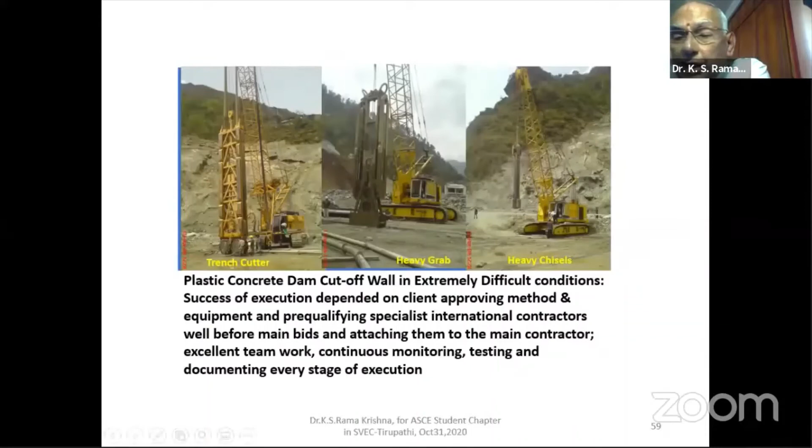Now, what I just want to tell our young civil engineers is that there are a lot of challenges and demands. With that, civil engineering looks very interesting, particularly foundation engineering. We need to have very good technical knowledge, and we need to update it continuously. And we must know the construction processes.

We may know the principles of mechanics, strength of materials, design processes, codes - all that is one part. The construction processes and technologies is another part. And you must be equipped with quality assurance, quality control, and production benchmarks. How fast we can bring this technology is most important.

Equipment knowledge should be there. Tools and accessories we should learn. So this makes the engineering knowledge complete.

Then, of course, our attitude, temperament, and commitment, because civil engineering job is a very challenging job. It is almost like a battlefront. You need to have a lot of coolness to learn the job and do it. You'll have good stress, timelines, and all that.

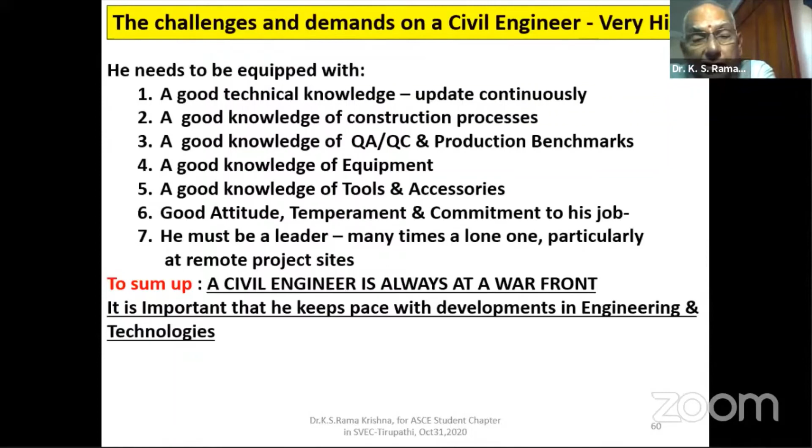Then, above all that, you must be a leader, because where you are working, you may not have any help. You are the lone leader there, and most of the project sites are very remote. You must know that you need to develop those leadership qualities. With all these things, and using technologies, one can become a good civil engineer.

In summary, I would like to say geotechnical engineering: design is one part, construction is another part. Design is complete only when construction is complete. Unlike in structures, where you can release the drawing and the rest is taken by the construction side, in design for foundation engineering, you have to be available all the time, because soil is an unknown material.

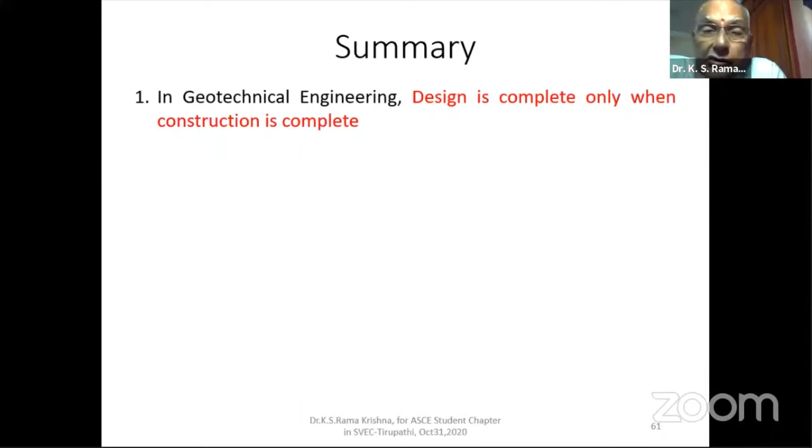So design changes are required, methods have to be changed, sometimes equipment has to be changed. Unless the construction is complete, your design is not complete. The second thing is you must have knowledge of technologies, equipment, and methods of construction. And the third one is, if foundation - most important thing is foundation - if foundation is delayed, the project gets delayed. You can be rest assured that if the foundation construction is delayed, your project will go for a six, both in time and cost.

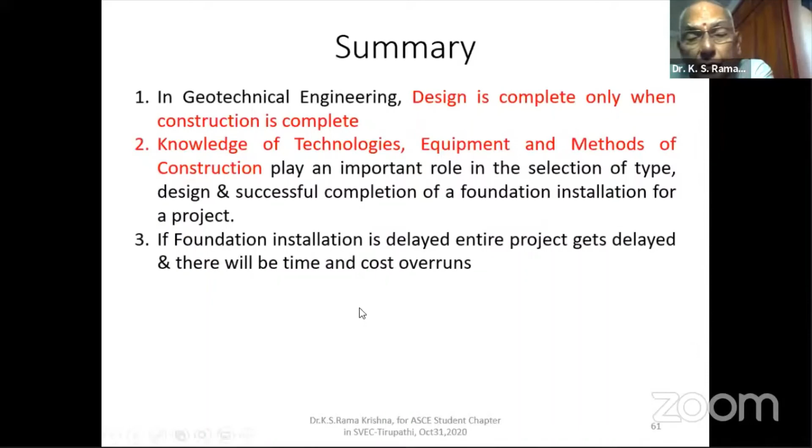So we have no choice but to embrace technologies if we want accelerated growth and development of our country. I request that you spend some time learning these things. A lot of these things will be available on YouTube - those titles and names and vocabulary I introduced - you will be able to go through them in more detail. You can see case studies of both success and failure stories to become well equipped with knowledge.

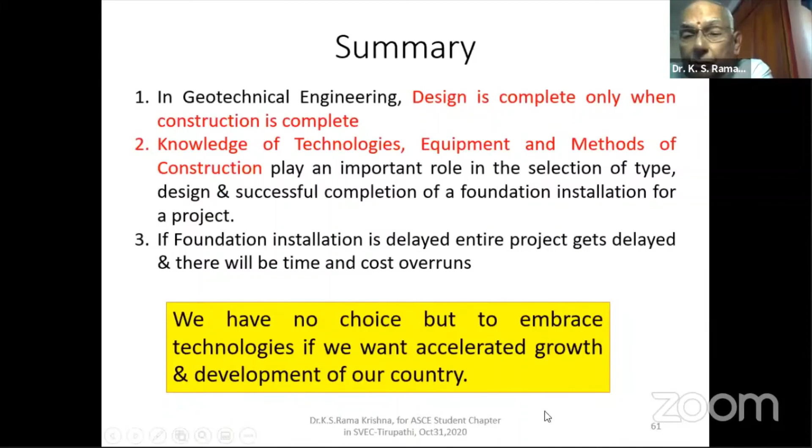Thank you, and I wish you all a very bright career. Thank you. If you have any questions, I am available.